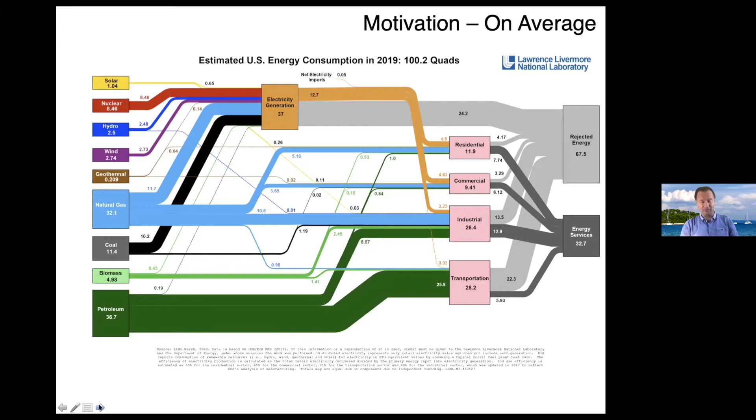As a point of curiosity, I actually went back through all the slides as I was preparing for this, all the Lawrence Livermore charts, and in 2013, for example, the rejected energy was 59. The total amount of energy that we spent went up by 4 quads, and the rejected energy went up by 8. So that's not great news. I know in 2020 things have lightened up a bit, but that's due to a catastrophe that we're living through right now.

Commercial energy end usage is split between buildings, industry, and transportation. And one point on this chart that I'd like to emphasize is that between lighting, space heating, and space cooling, both in the commercial and the residential, there is the biggest kind of impact if we want to reduce the amount of energy that is being used. And of course, today a lot of commercial buildings are empty, and yet the systems in them still operate at a certain level, and so they are using energy.

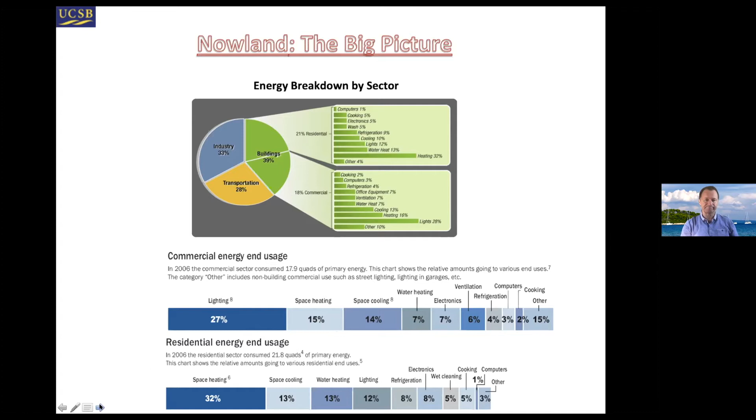The problem is not easy. The complication in a modern building, a kind of mock drawing is shown over here, is that there are many different types of systems with different physics that all combine for a pretty singular purpose, and that's to keep the occupants comfortable. So energy, to a certain extent, is a secondary thought.

If you look at a large commercial building, if a yearly spend on salaries and work in general, production in general, is about 100 million, you're going to get about 2 million or 3 million spent on energy. So it's only 2 or 3% of the overall spend in the building, and yet there are all these interconnected systems that are allowing for that comfort to happen. And so very often the energy issues are not top shelf, if you wish, in this context.

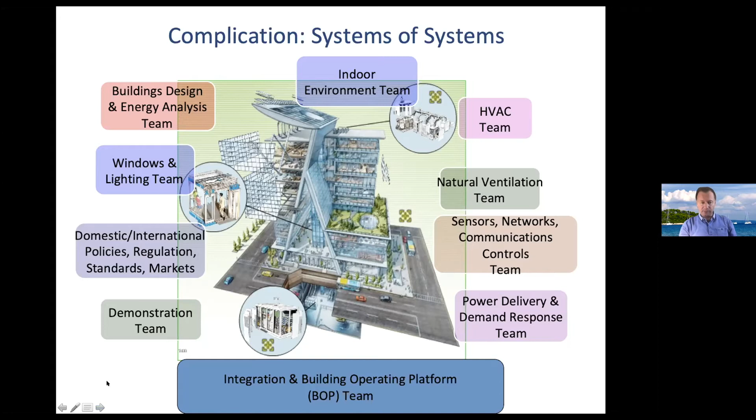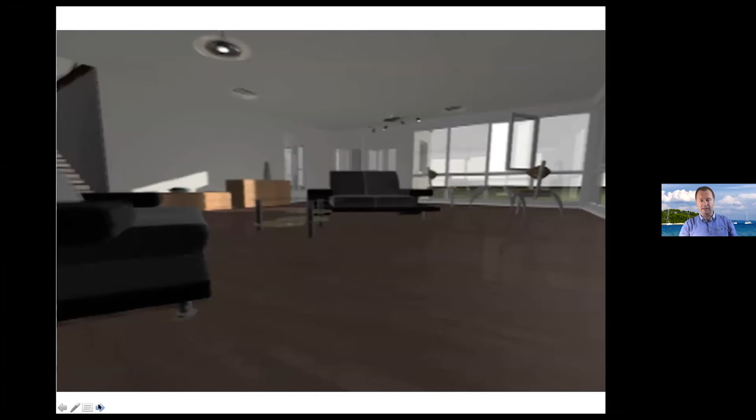And the technical problem is not very easy either. Here is a little movie that shows you the air conditioning in a residential context coming in, and then here is this air conditioning right next to an open window. The smart system should understand that the window is open and the air conditioning is cooling the room, and just close the window so as to optimize. The algorithms for this are starting to be deployed on a wider scale, and they need to take into account a lot of different elements.

Not to speak about the fact that if you actually take into account the whole building, the whole residential context, and you have an electric car, and you have microgeneration that I think we are going to hear about next. And there is this utility aspect over here. I picked this up from a thesis, a Peffer thesis at Berkeley.

Then you get something that is a dream: a demand response electrical appliance manager that connects the residential building to all the peripheral stuff, the production, the vehicle, the transportation, and so on and so forth. And all of this has to work in unison in order to provide value.

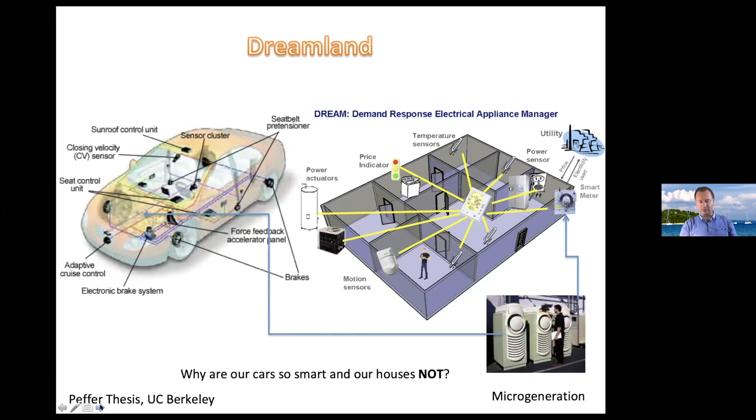What is possible if you deploy smart technologies? Well, there is a universal agreement that a 20 to 30% reduction in HVAC energy, for example, is possible. And what would it translate to in savings? About $15 per month for the average household in the US. I think we're collectively going to agree that that's not much on the residential side. At a national scale, however, it translates to $15 billion annually, and would prevent approximately 1 billion tons of pollutants from being released into the air each year.

So the issue is that this needs to be done without an additional burden to the occupants. So it needs to be done seamlessly and securely, and that certainly provides the background for developing automation in order to provide both comfort and energy.

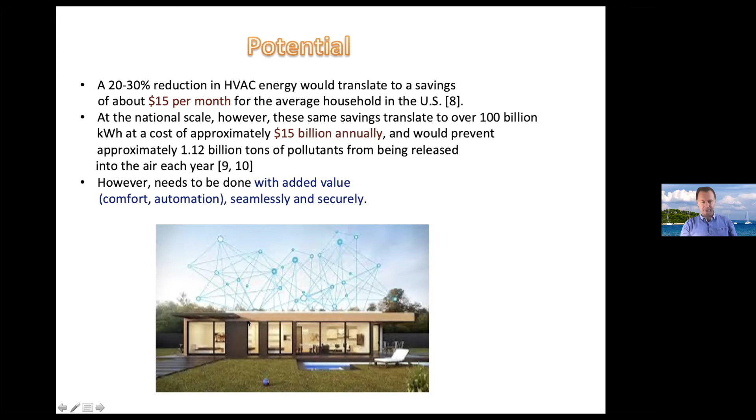The question that is asked very often in this context is, if you really develop an automated procedure, how well can you do? So this is a part of our own work. We have simulated this building in Las Vegas, Nevada, to see what a nominal performance building with a certain variation in parameters, described by this black distribution here, does on the energy scale for facility gas and electricity, both for the peak demand and the annual consumption.

And what you're seeing here, the take-home story, is that the savings seem to be vast, right? So you can do really, really well in this green zone if you deploy high-performance systems inside the building. Everything shifts to the left. That is really nice. This scale is in gigajoules. Everything shifts to the left, and on average, you can achieve tremendous savings in energy.

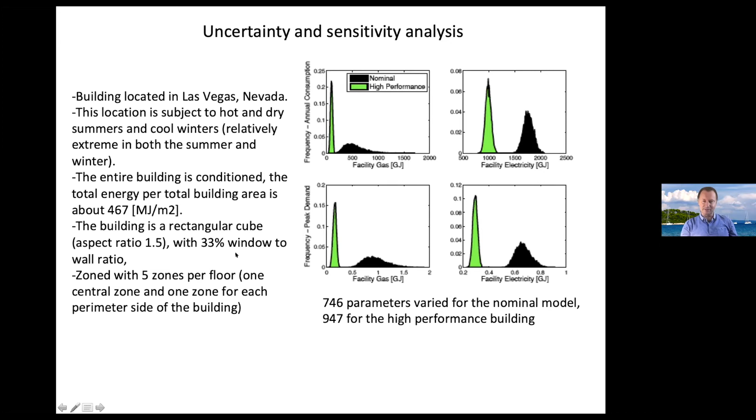So this conundrum between energy and comfort doesn't necessarily need to exist. The point that I'm trying to make here is that they can coexist. So you can design buildings that are extremely comfortable, that at the same time spend low energy, and that does away with that old joke that the best way to save energy in buildings, of course, is to turn all the systems off.

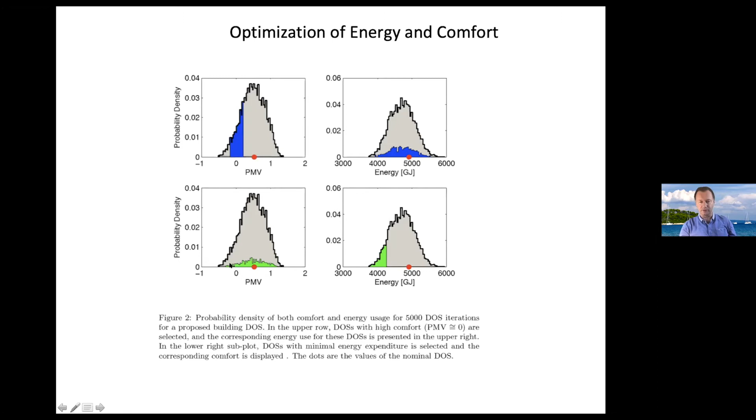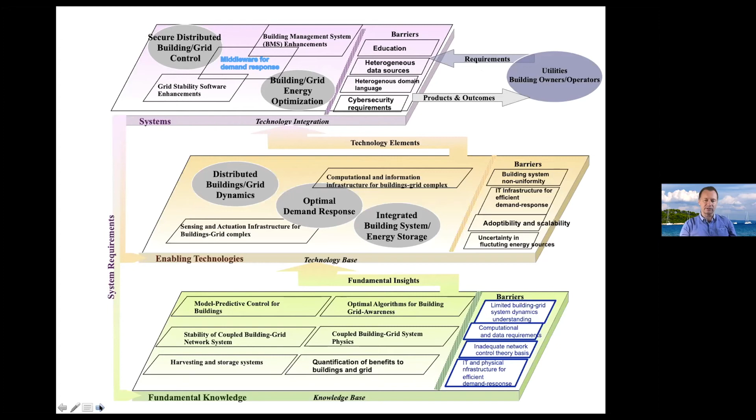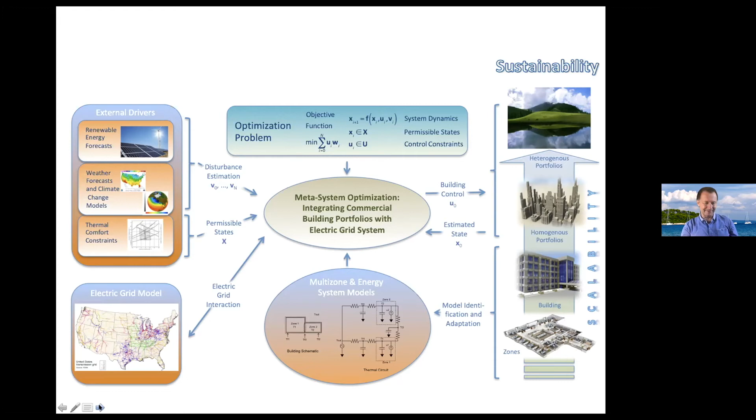First on the side of zones, building. Then we go to portfolios that might be somewhat homogeneous, and then heterogeneous portfolios, and we finally get to sustainability that is similar to the background that I have in the Zoom right now. What is our approach to those points?

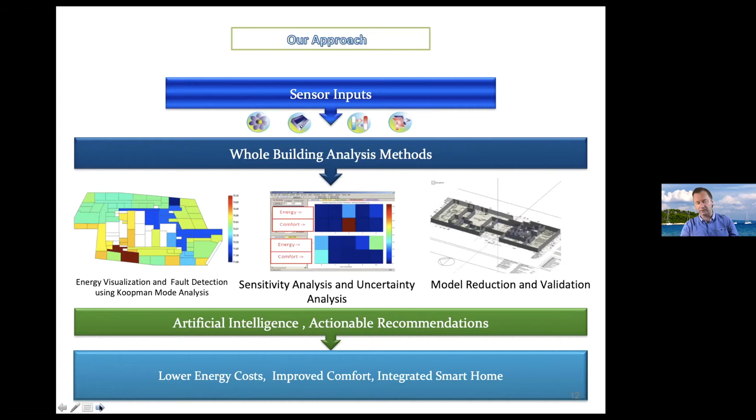So there is still something to be done on the physical side there, but some of the common items that need to be corrected are actually software based, and they can be corrected in an automated way. The promise is then that we have lower energy cost, improved comfort, and an integrated smart home on the residential side.

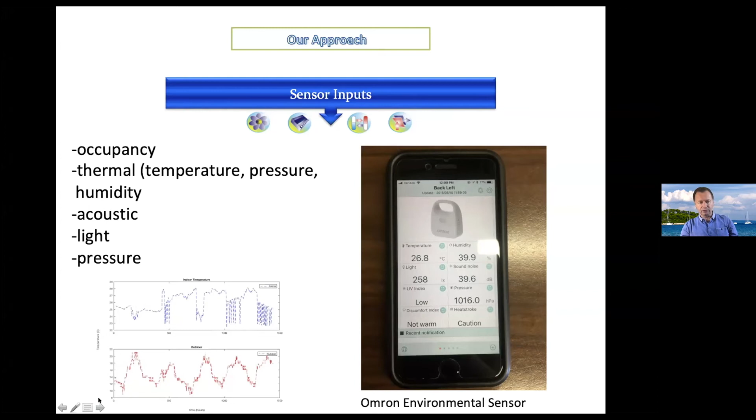What do the sensors look like? There is an Omron sensor that we actually deployed in our own lab: temperature, humidity, light, sound, noise, UV index, and so on and so forth. And then you can plot the temperature, let's say the indoor and the outdoor contrast, using algorithms between these two and other aspects. So when you have these sensors positioned, this is actually the Stanford Precourt Institute building, I guess a competitor, right, John?

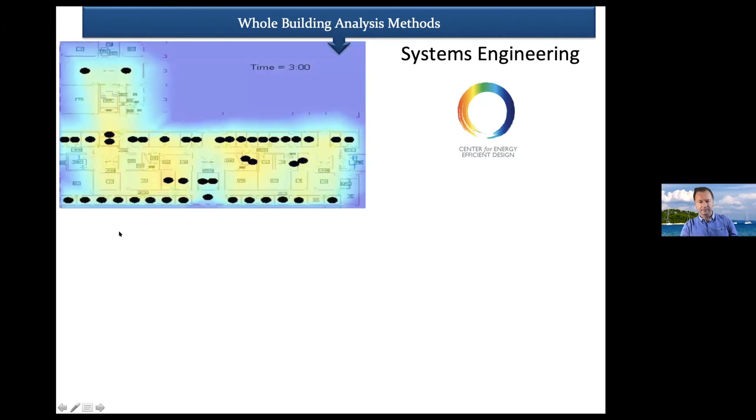And there are areas in the building that from time to time get really cold. There are areas where there are data systems and so on. So this kind of information provides us with the ability to analyze what affects the energy and the comfort in a dynamical environment like this.

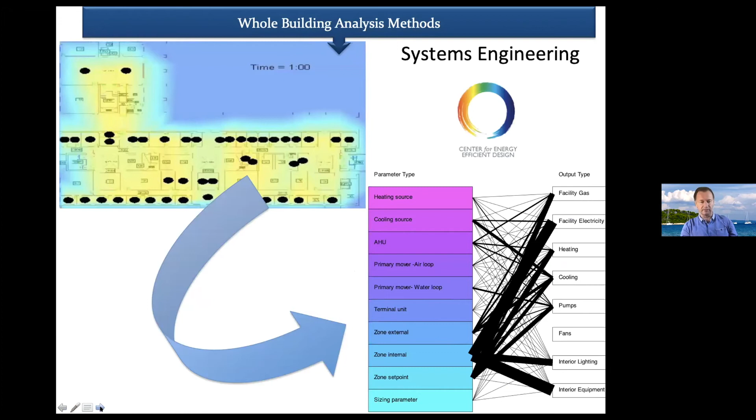And those, to a certain extent, are the hardest to optimize because they, of course, depend on many different factors. Like I pointed out, the external factors like weather, but also internal, like occupancy. And we don't have a massive base of buildings that have occupancy sensors. Combinations of those factors can be important as well.

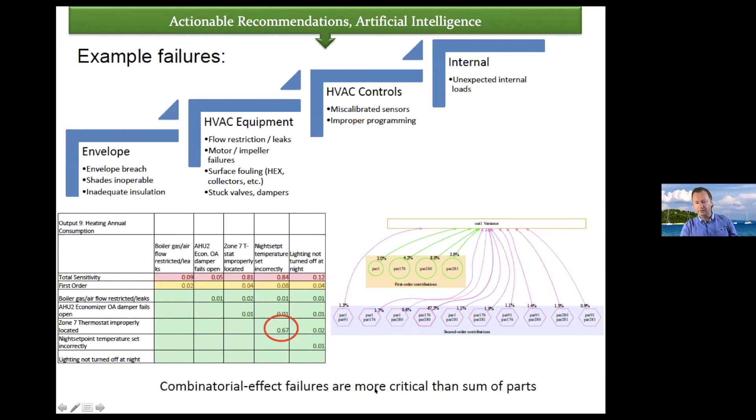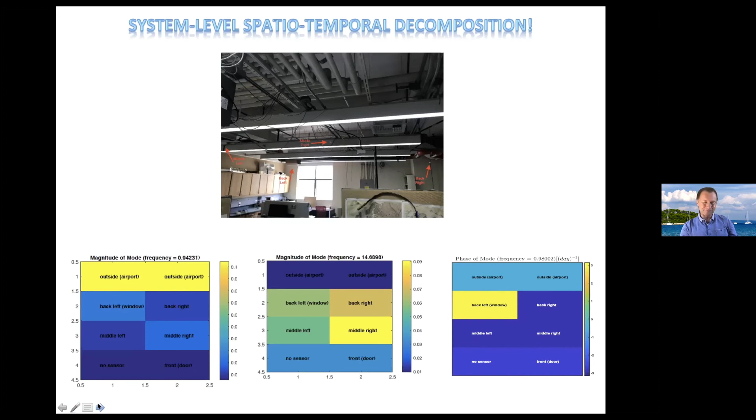So in conclusion, we focus on integration of software tools, development of artificial intelligence in the energy space. We have some good underlying algorithms. I hope you saw from this perspective that commercial buildings do offer massive opportunity for energy efficiency, reduction of energy costs.

The problem with the residential buildings is the savings are relatively small on an individual residential building, but they're actually large overall. Extracting efficiencies from buildings and grid operation together can yield large energy savings, and I'd like to thank the Zaleski Foundation for funding part of this work.